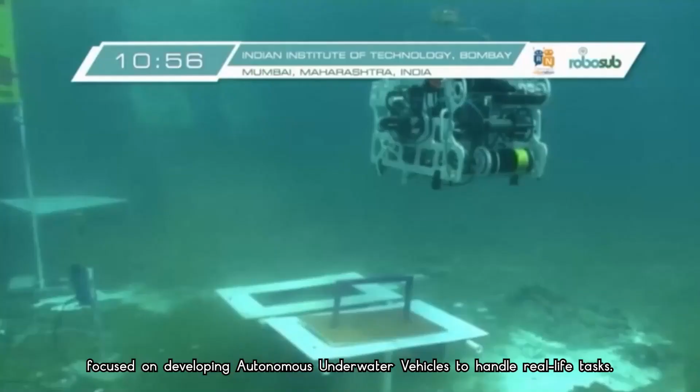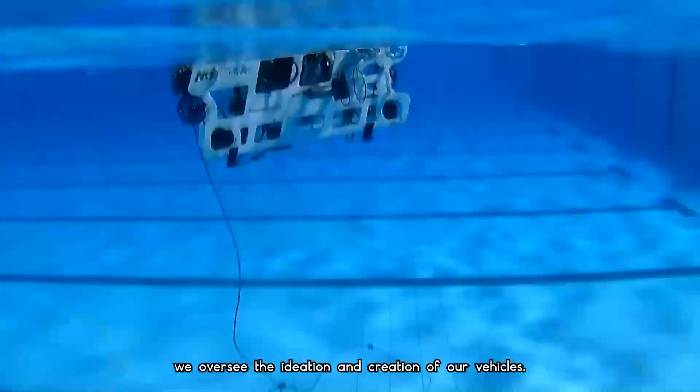AUV-IITB is a multidisciplinary team of 55 members focused on developing autonomous underwater vehicles to handle real-life tasks. Through the consistent effort put in by members of our 4 subdivisions, we oversee the ideation and creation of our vehicles. Our flagship series is named Matsya, which is derived from the Sanskrit word for fish.

Hi, I am Sanjyoti Narak, a fourth-year undergraduate from the Department of Electrical Engineering at IIT Bombay. I am the current team leader of AUV-IITB. Hi everyone, I'm Akshat Rajlat, a senior undergraduate student at the Department of Mechanical Engineering, IIT Bombay. I'm one of the current team leaders of Team AUV-IITB. Hi, I'm Mohan Abhyas, fourth-year undergrad from Computer Science Department, and I'm one of the current team leaders.

I'm Nandagopal, a third-year undergraduate from the Mechanical Department, and I'm the Mechanical R&D head of the team. And this is the Mechanical division of the team. Hi, I'm Shubham, third-year undergrad from Chemistry Department, currently the Electrical Subsystem Head and the Design Team Head. And this is the Electrical Subdivision of the team. Hi, I'm Richard, third-year undergraduate from Electrical Department, and I am the Software Subdivision Head. And this is the Software Subdivision of the team.

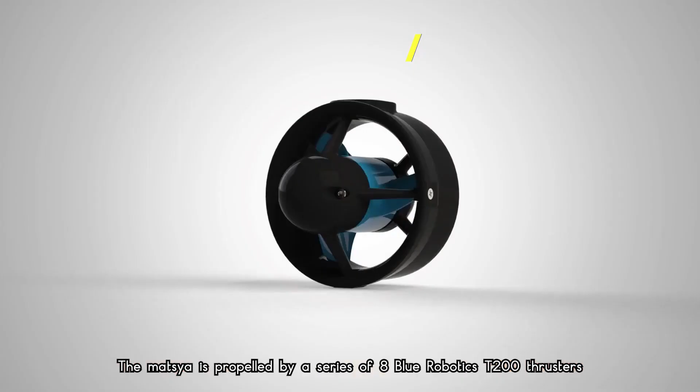The Matsya is propelled by a series of 8 Blue Robotics T200 thrusters based on brushless DC technology. The chosen thruster configuration ensures mobility in all 6 degrees of freedom while minimizing undesired residual torques. Special emphasis is given to ensure maximum torque is available in rotational axes for efficient control.

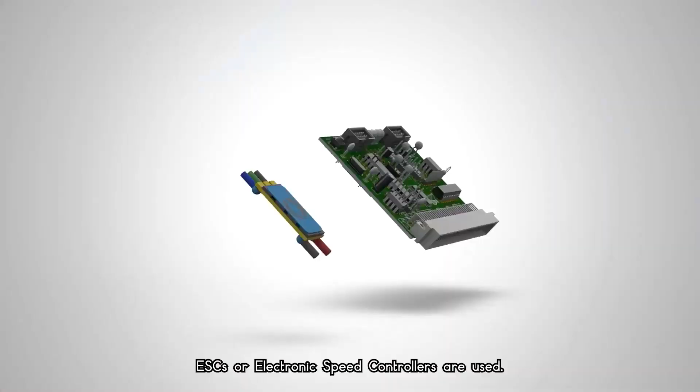To control the speed of the thrusters, ESCs or electronic speed controllers are used. PWM signals generated by the GPIO board are also applied. The board also features double redundancy in case one of the microcontrollers fails, thus increasing the reliability. It also features the thruster kills, which are the hard kill and the soft kill.

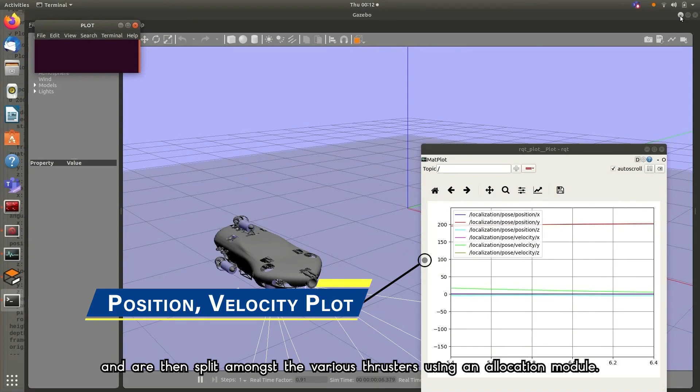Control is achieved by a PID-based feedback control structure. The required control inputs in the 6 degrees of freedom are calculated and are then split amongst the various thrusters using an allocation module. Finally, PWM values are computed using a thrust versus PWM mapping and are then sent to the various thrusters using the CAN bus.

Let's get acquainted with the specifications. The first thing required while designing the propulsion system is the requirement of speed in all directions and the total degrees of freedom. After considering the power requirements, the number of thrusters and their orientation is decided. Moving on to thruster configuration. We have a total of 8 thrusters.

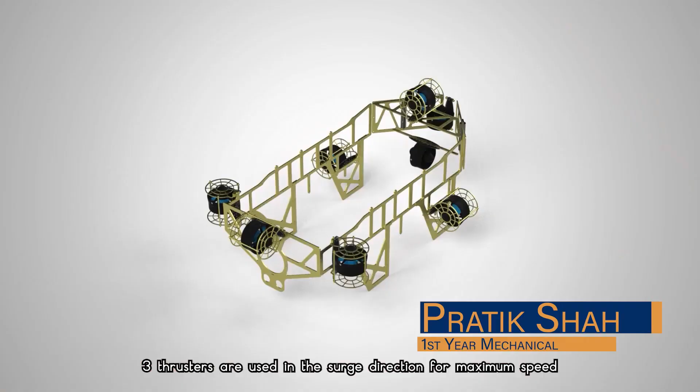3 thrusters are used in the surge direction for maximum speed, along with 3 in the heave direction. The 3 heave thrusters also help in pitch control. A minimal amount of thrust is required in sway because there are few resistive forces, and so we only use 2 thrusters.

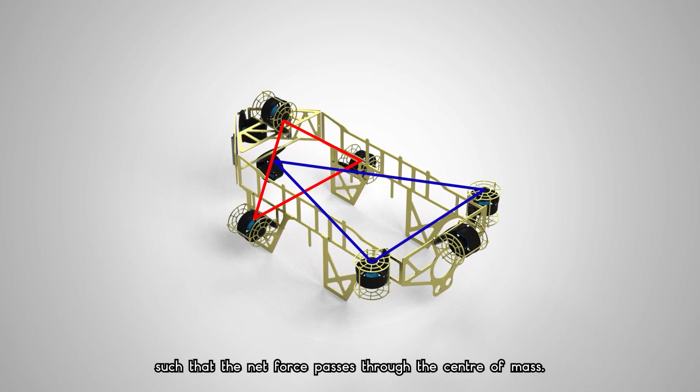We position the surge and the heave thrusters at the vertices of 2 distinct isosceles triangles such that the net force passes through the center of mass. This eliminates any undesirable torque. The sway thrusters are positioned as far apart as possible to give higher yaw torque. Next, let's learn about frame analysis.

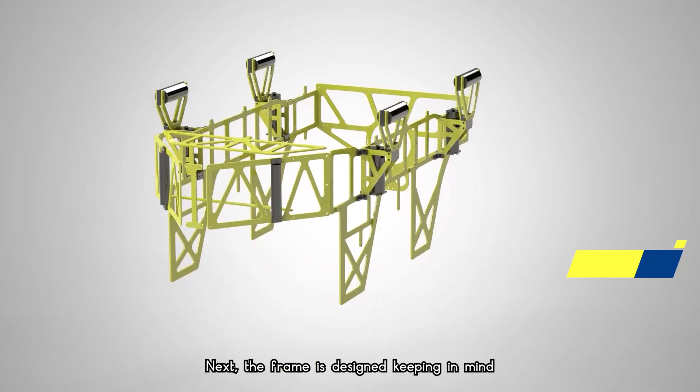Next, the frame is designed keeping in mind the positioning of thrusters, and its structural integrity is tested at maximum operation force via static structural analysis. Finally, we perform CFD analysis to estimate the drag force that the vehicle will experience and its maximum achievable speed. Following all the mechanical aspects, we now examine the electrical elements.

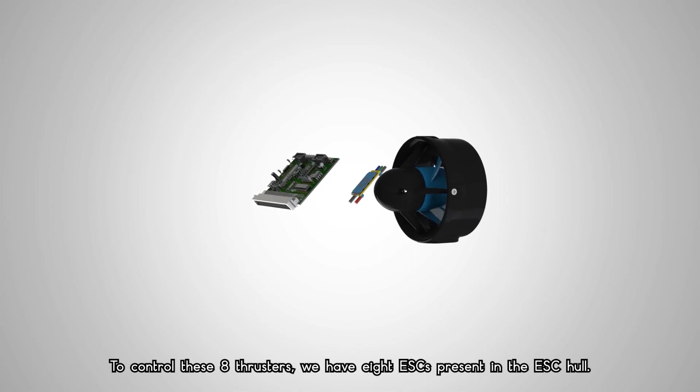Now we have the structure ready, but how do we control them? To control these 8 thrusters, we have 8 ESCs present in the ESC hull. These ESCs use the PWM signals generated by the GPIO board to control the speed and direction of the thrusters. The ESCs can handle very high currents required by the thrusters, which can reach up to 25 amps. To tackle the heat generated by the ESCs, they are placed in a separate hull away from the main electrical stack.

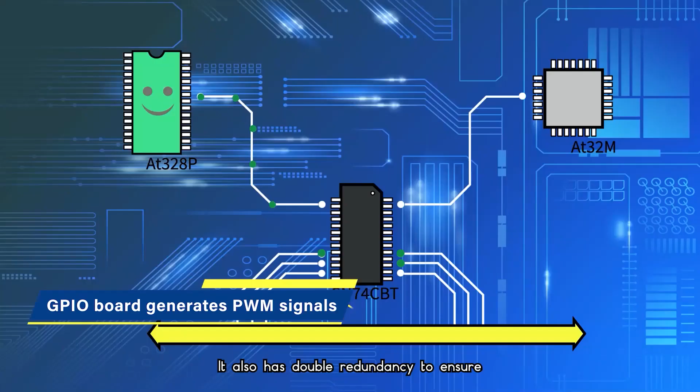Now it's time to meet the mastermind behind controlling the ESCs, the GPIO board. The GPIO board is responsible for producing PWM signals. It also has double redundancy to ensure that the board remains functional in the case that one of the 2 microcontrollers fails. This increases robustness and fault tolerance. The 2 microcontrollers utilized are Atmega 328P and Atmega 32M1.

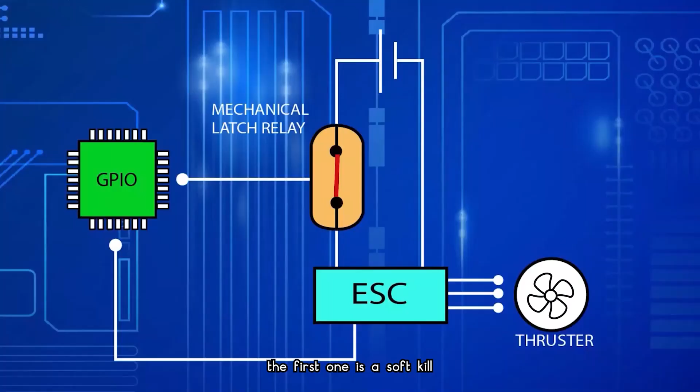Matsya 6 has two layers of kill protection against system failures. The first one is soft kill, which shuts the thrusters by cutting off PWM signals. The second one is hard kill, which shuts down the vehicle by breaking the connection between battery and thruster with the help of mechanical relays.

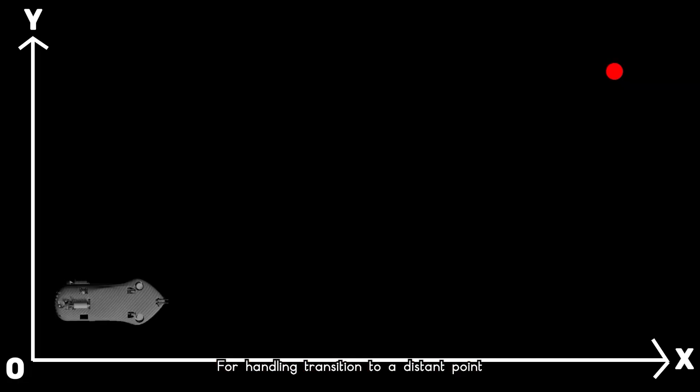Now we know how to propel the vehicle if we have the PWMs. But how do we calculate them? Welcome to the control system. For handling transition to a distant point, the navigation module generates a path depending on the requirement or the way we want to traverse the route. The navigator achieves this by breaking down the points into a series of set points.

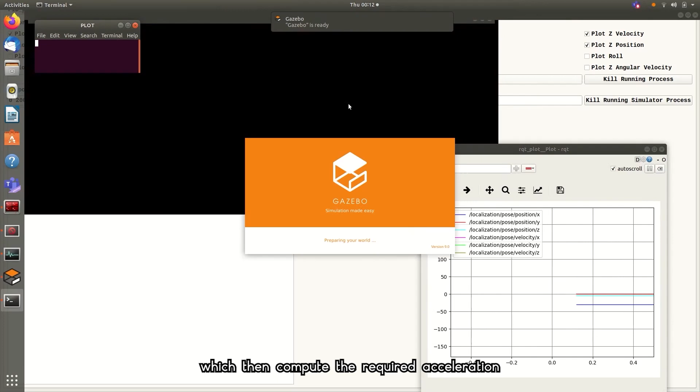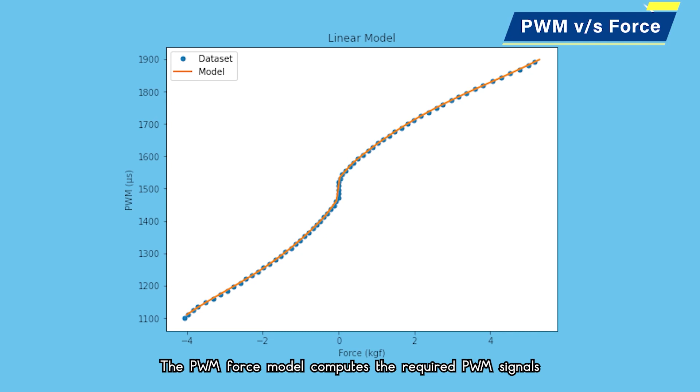The set points are then fed sequentially to the 6 PID controllers, which then compute the required acceleration in each of the 6 degrees of freedom. Then the forces for individual thrusters are computed by the allocator. After the computation of these forces, the PWM force model computes the required PWM signals, which are then sent to the thrusters to achieve the required propulsion. Congratulations! Now you know everything to design your own propulsion system.

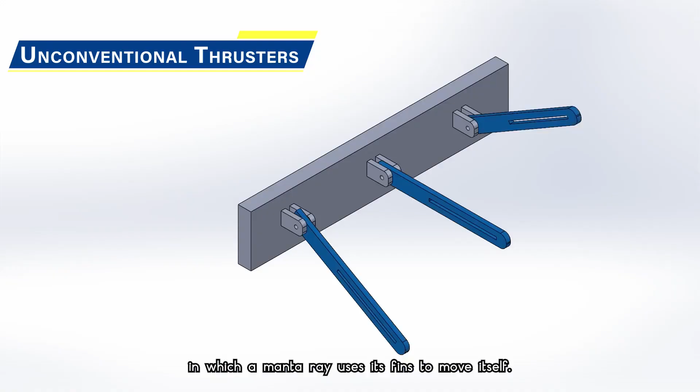Conventionally, we use propellers to provide thrust in a vehicle. We have already researched various mechanisms and systems to provide thrust. Undulatory fins are found to be a popular bio-inspired mechanism in which a manta ray uses its fins to move itself. This mechanism was found to be very modular as it can act as a vector thruster, and the thrust provided can also be varied with the amplitude of the wave generated in the fin.

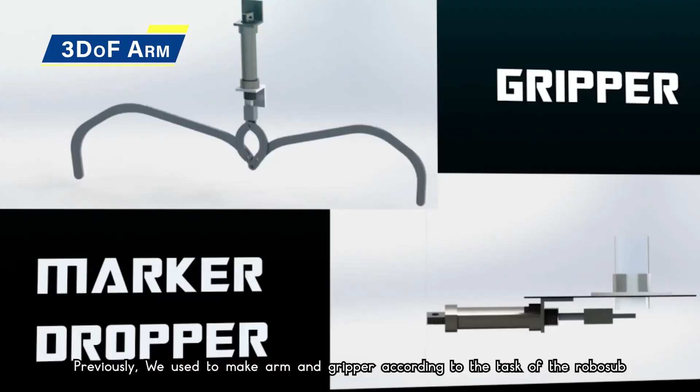Previously, we used to make the arm and the gripper according to the task of the RoboSub, and it needed to be rebuilt completely from scratch every year depending on the problem statement. So this year, we decided to make a universal arm that can be used for any task with the least number of improvements. This arm is a completely autonomous 3 degree of freedom arm, and it has gripping feedback and a replaceable end effector that can be designed explicitly for the task involved.

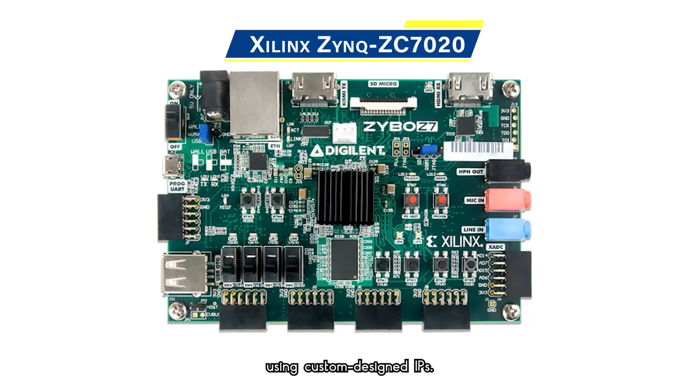Pinger localization on FPGA. This project was undertaken to replace the DAQ with faster and more efficient localization of static underwater targets. We implemented the TDOA algorithm on the Xilinx Zynq-ZC7020 FPGA using custom designed IPs. Using hardware for real-time processing also decreased the load on the SBC. The design and implementation on FPGA was successful in testing as well, thus replacing the DAQ.

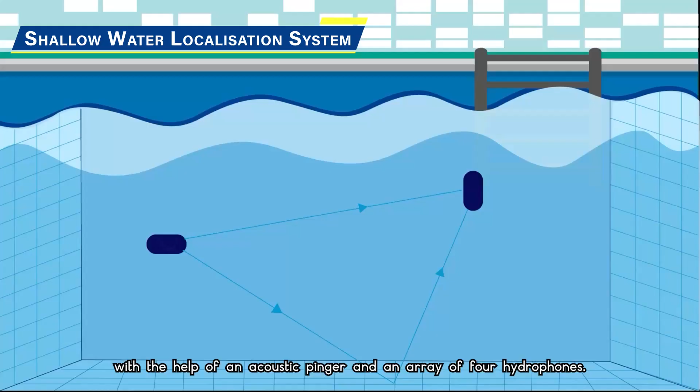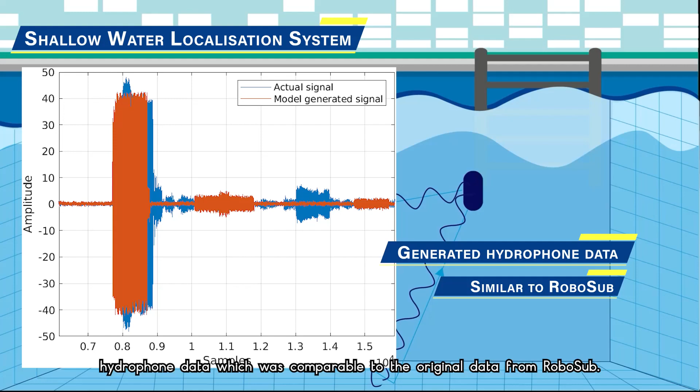We developed a model of a shallow water localization system which also helped in modeling of the pinger task. In this system, one AUV is used to localize another AUV with the help of an acoustic pinger and an array of 4 hydrophones. The pinger emits the ping in a swimming pool environment, created taking into account reflections, attenuation and Doppler effect. With the help of this model, we were able to generate hydrophone data which was comparable to the original data from RoboSub. In our current algorithm, we added real-time ping detection in pinger localization.

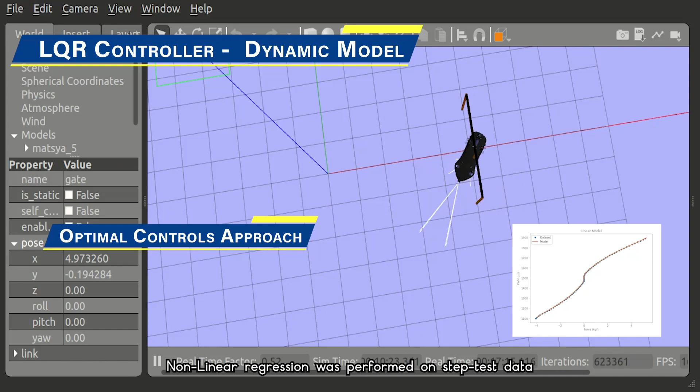Our previous PID-based controller required extensive tuning and offered limited performance in non-linear systems. We moved to an optimal controls approach which gave better performance and reduced tuning. Non-linear regression was performed on step test data to estimate model parameters and to develop an LQR controller which solves the linear quadratic optimization problem based on full state feedback. LQR optimizes both for state error as well as control input and gives the designer the choice to weigh energy consumption versus performance.

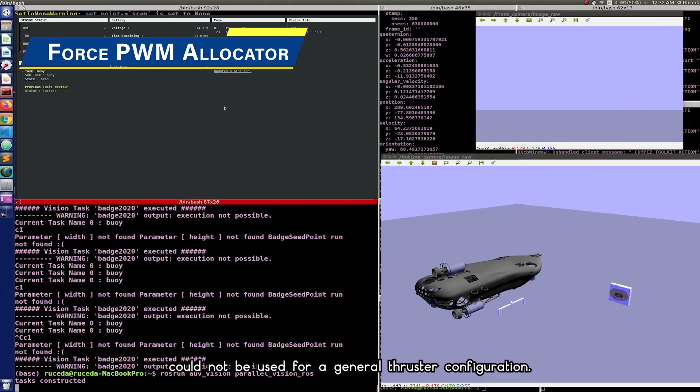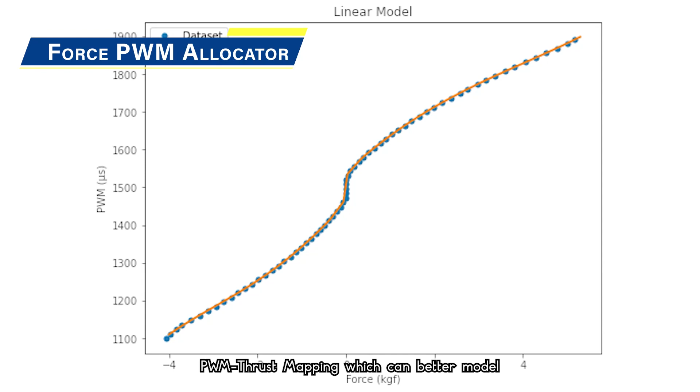Our previous allocator used a cascade of conditional statements which was computationally expensive and could not be used for a general thruster configuration. Our new allocator uses a pseudo-inverse of the input matrix with provisions for thruster saturation. To accompany this, we developed a more refined PWM thrust mapping which can better model the complex non-linear relationship.

For effective obstacle avoidance in underwater environments, it was necessary to include a path planner module in the navigator. The team developed an artificial potential fields-based path planner that could return smooth paths for traversal through the RoboSub environment without the need to maintain a grid map of the domain. To aid the performance of obstacle avoidance, we integrated our path follower module, which fits splines to the given set of points and feeds targets to the controller. This module has been tested extensively in the simulator.

Most existing video denoising algorithms assume a single statistical model, which often is violated in practice. We applied the low-rank matrix completion algorithm without considering any noise model for denoising videos corrupted with Gaussian, Poisson, and impulsive noise. It outperforms standard denoising algorithms like video block matching and 3D filtering, VBM3D, and principal component analysis, PCA.